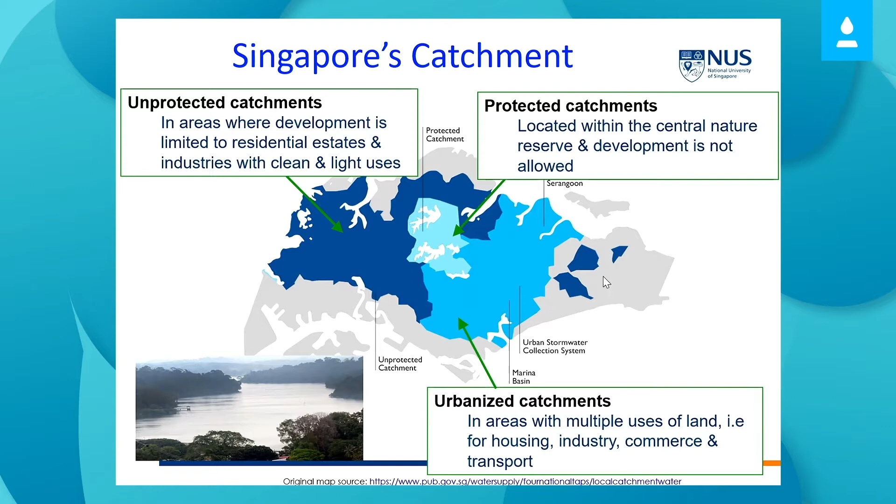In terms of Singapore's catchment for water, we are actually trying to expand along the years, making use of technologies that help us to do so. For example, Marina Reservoir is a relatively new reservoir - the first reservoir in the city center, which collects rainwater from the highly urbanized catchment. This was built in 2010.

One year later, we built two smaller reservoirs - Punggol Reservoir and Serangoon Reservoir. Together with Marina Reservoir, they increased Singapore's catchment area from previously only about half of the land area to now two-thirds of the land area. So this is something we have done through infrastructure building to expand the catchment.

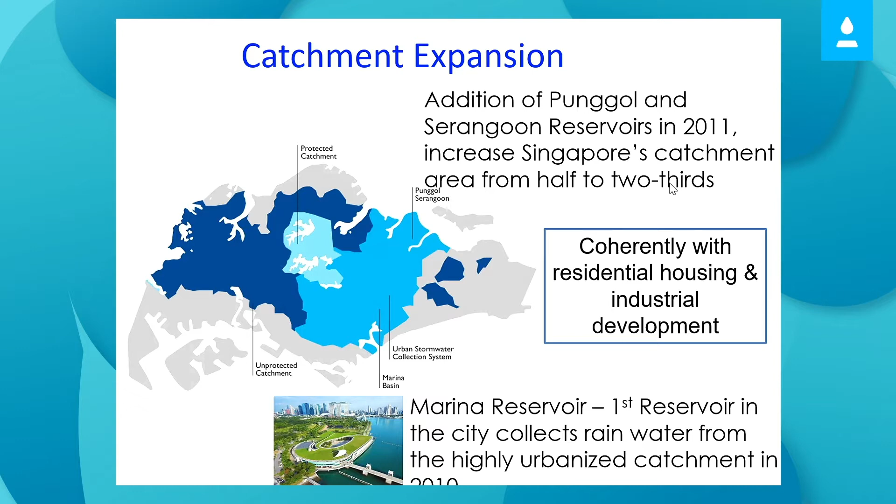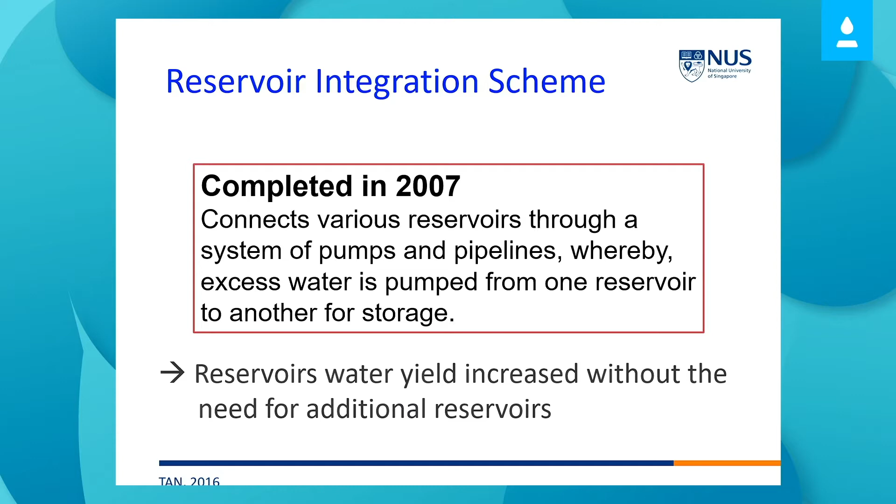On top of that, there's also a reservoir integration scheme, completed in 2007. Under this scheme, we connect various reservoirs through a system of pumps and pipelines, so excess water from one reservoir can be pumped to another for storage. This way, we are able to manage the quantity and quality of water and optimize the performance of the reservoirs. Through this integration scheme, reservoir water yield can be increased without building additional reservoirs. This is something we have done nicely, on top of building those novel reservoirs located in the city center.

Another strategy we have is the so-called harvesting of unconventional water resources.

Singapore came up with an integrated water management system. Underneath this system, we have 4 national taps. Singapore developed these 4 national taps to ensure a stable and sustainable supply of water. The first is water from our local catchment, basically water we obtain from our reservoirs.

Number 2 is imported water from the neighboring country. Number 3 and number 4 are the 2 national taps we recently developed, and that's why I'd like to highlight them more. Number 3 is called NEWater, a highly purified reclaimed water. Number 4 is desalinated water.

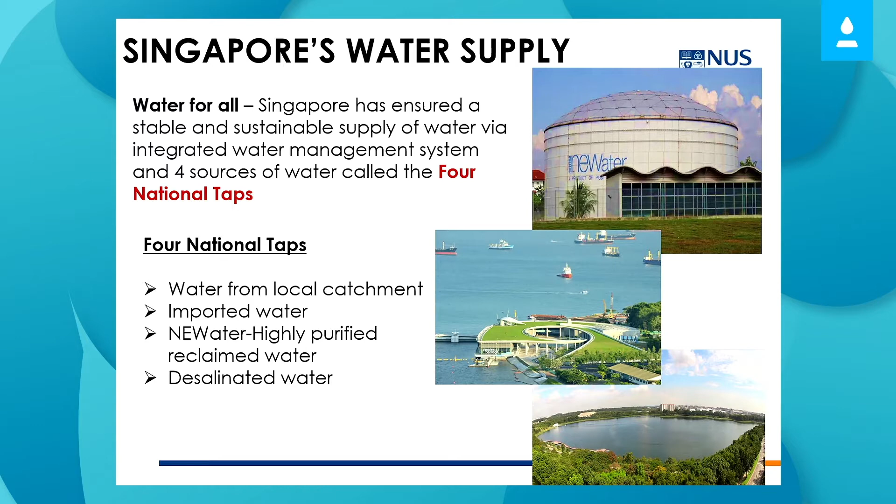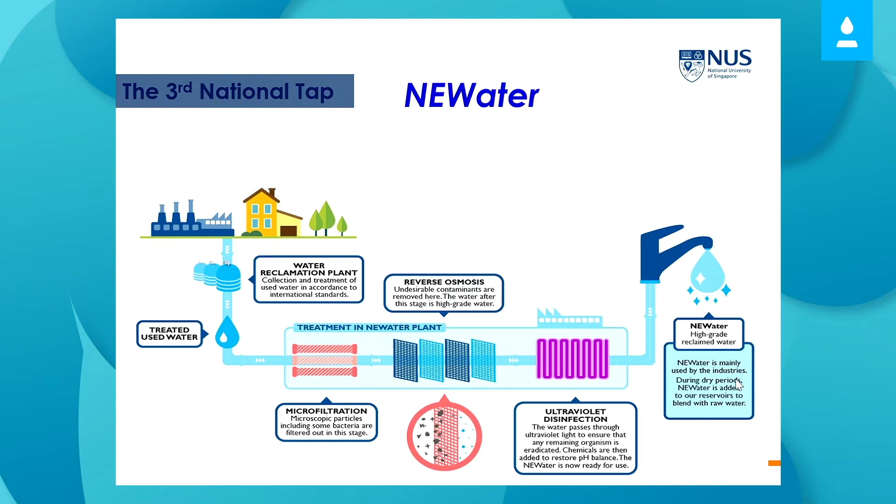In the past 2 decades, Singapore put in a lot of effort to develop national taps number 3 and number 4. For NEWater, our third national tap, it is basically treated effluent from what we call a water reclamation plant. It goes through processes like microfiltration, reverse osmosis, and ultraviolet disinfection. Eventually we generate very high quality reclaimed water, which we name NEWater.

In terms of current status, NEWater is able to meet up to 40% of the nation's current water need. Almost 40 years later, we expect NEWater to be able to provide 55% of Singapore's future water demand. This is one of the NEWater factories at the east part of Singapore, very close to our airport, using reverse osmosis technology, the core technology that helped make NEWater a reality.

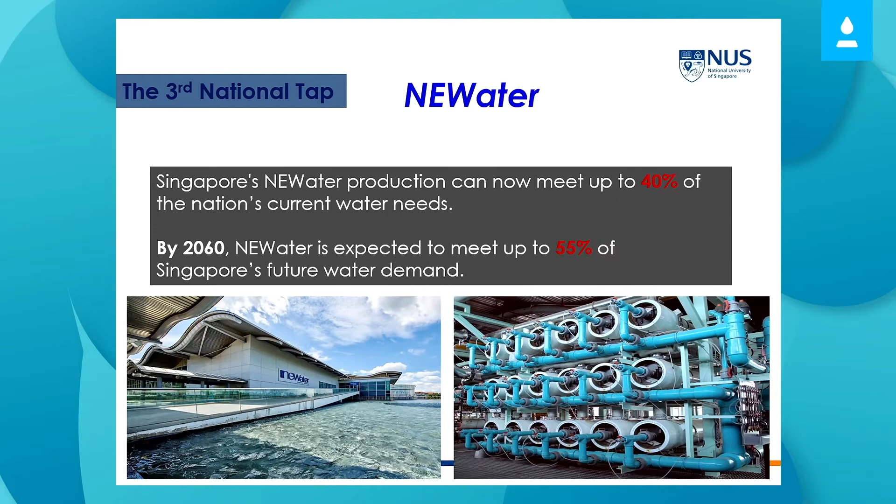Before we launched the NEWater project, we studied the NEWater quality very intensively. We looked into a number of water quality parameters, including physical, chemical, and microbiological parameters. Eventually we concluded that NEWater is able to even surpass the existing quality of the potable water we have.

Another thing we did was adopt animal studies to examine the potential health effects. We concluded that NEWater doesn't show any negative health impact on the animal models we chose. These 2 very important R&D research projects were conducted by a group of researchers at the National University of Singapore before we made NEWater a reality for society.

For this toxicity and carcinogenicity assessment, we made use of mice as our model. This is our animal model. We fed them the concentrate obtained from our NEWater and observed any potential toxicity and carcinogenicity over the lifespan of the mice. Our conclusion: no negative health impact observed.

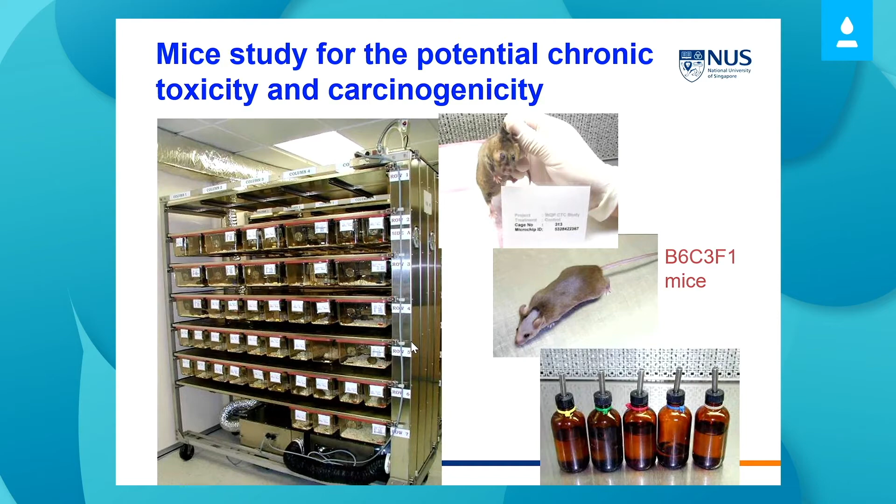On top of that, we also studied estrogenicity, making use of the transgenic fish, which is also a very nice model. In fact, NUS was the one that developed the protocol for the reclaimed water fish study. We were the first in the whole world to develop such a protocol, during the period when we were studying the potential health impact of new water.

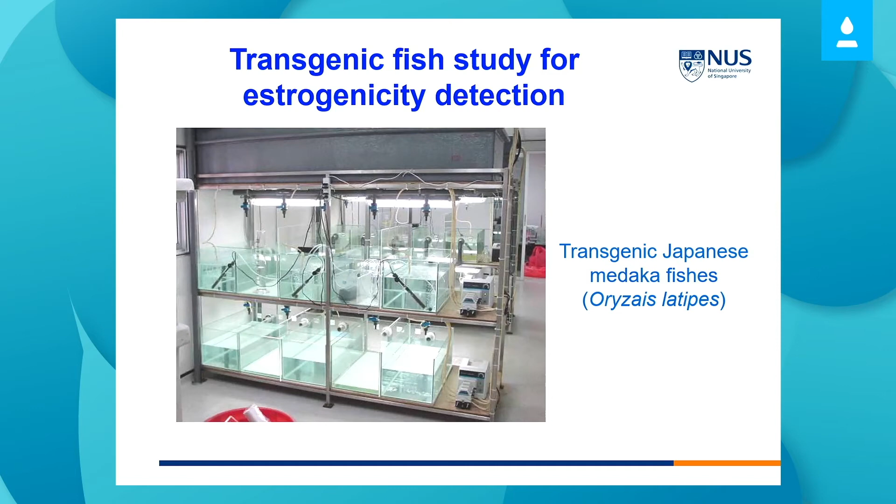We made use of the Japanese Medaka fish and observed 2 generations of the fish. The conclusion is that we couldn't observe any estrogenicity, which means we didn't see any negative health impact from this new water. All right, so that's our third national tap.

The fourth national tap comes from desalination. Basically, the seawater goes through reverse osmosis technology, and you generate drinking water, which then goes into our drinking water distribution network and blends with our current drinking water.

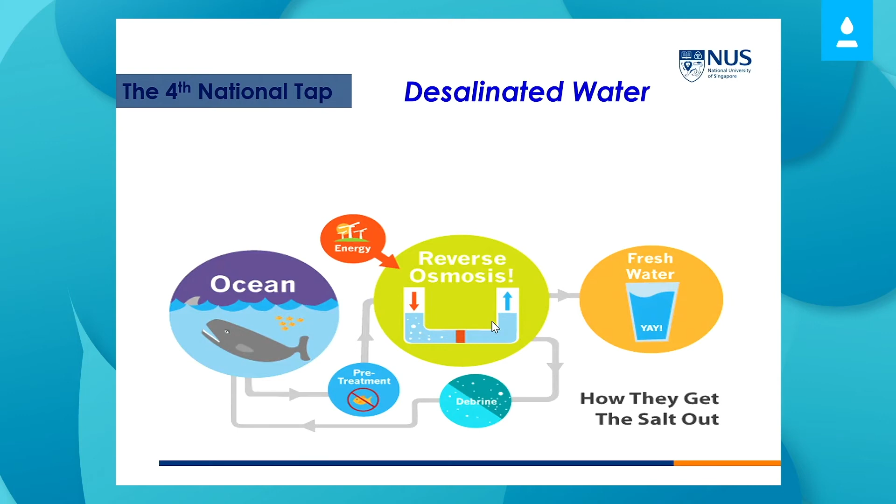So what is the status of our desalination in terms of providing water supply to Singapore? In 2005, we developed the first desalination plant in Singapore, one of the largest seawater desalination plants in the region. Subsequently we built an even larger desalination plant, then in 2017 we got a third desalination plant, and in 2020 a fourth desalination plant.

The aim is that by 2060, we hope desalinated water will be able to provide 30% of Singapore's future water demand.

After we developed such an integrated water management system, we are able to put the water in a closed loop. You can see the water come from the sky, it precipitates to the ground, it will be captured by our reservoir, treated for domestic and industry use, and the used water will be treated by the wastewater treatment plant. Some of it will go to our NEWater factory and come back to serve our industry, and a small portion will go into our reservoir to recharge it.

Seawater will be desalinated and will provide drinking water, going directly into our domestic use as well as industry use. So from here you have a very clear idea what I mean by the integrated water system in Singapore, which consists of four national taps. This makes our water supply sustainable and sufficient, allowing us to overcome the challenges we originally faced.

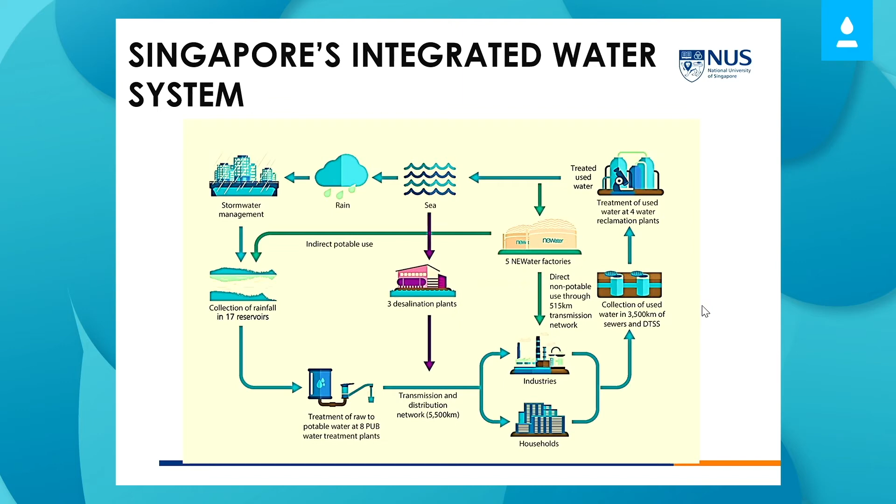Now I'd like to add a bit more on top of just those two strategies, because the challenges we face also give us opportunity, especially the opportunity to develop industry, the water industry. The water industry very much likes to promote innovation in terms of technology and commercialization of novel technologies. Singapore also wants to develop industry in that direction, and through developing our industry, we are able to make Singapore's water management even more sustainable. So R&D, technology transfer, and commercialization are very important aspects.

I'd like to highlight that since I am heading this Center for Water Research as director, the Center for Water Research was developed to closely collaborate with industry to provide R&D capabilities and water solutions to the industry. At the same time, we also generate a lot of capable manpower to support the water industry.

The Center for Water Research works on four aspects of the research and development domain. One is used water treatment and reuse. Another is advanced membrane process. The third is water treatment and water quality assessment. And the last one is about renewable energy.

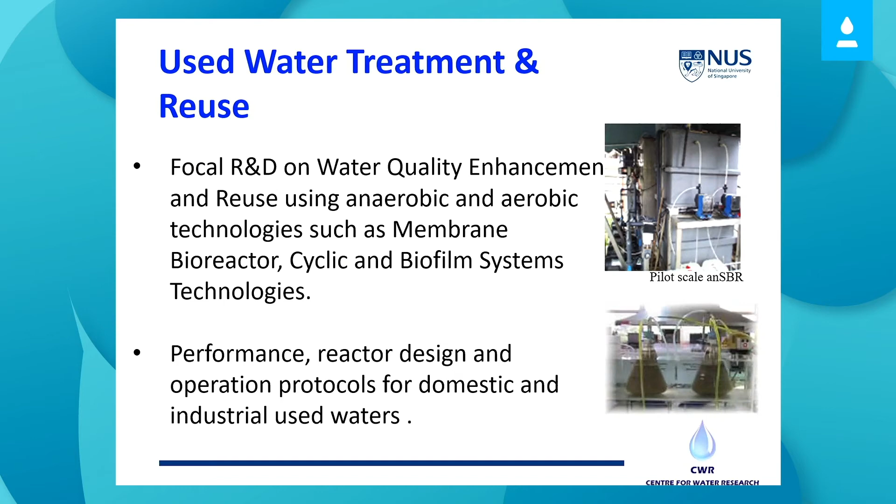Let me give you one example of what we recently did. We have a technology which couples advanced oxidation process together with biological process to treat industrial wastewater, trying to achieve low COD concentration in the treated effluent for two purposes: one is to meet the discharge standard, or if the quality is acceptable, the plant can also recycle this water for their own reuse purposes.

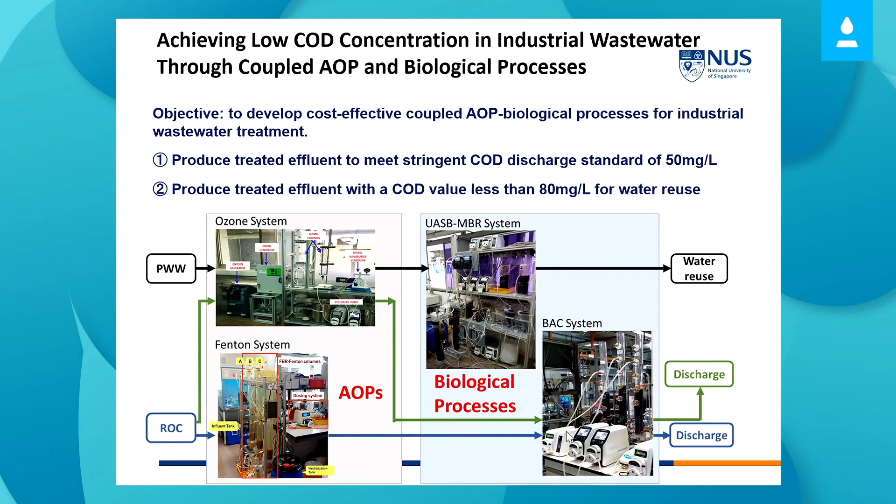So in the Center for Water Research we developed advanced oxidation processes like an ozonation system and a Fenton system, coupled with downstream biological processes. It can be UASB followed by MBR, or simply followed by a BAC system, which is biologically active carbon. This way we can make the water reusable, or make it meet discharge standards, even very stringent ones. This kind of combination is capable of doing that.

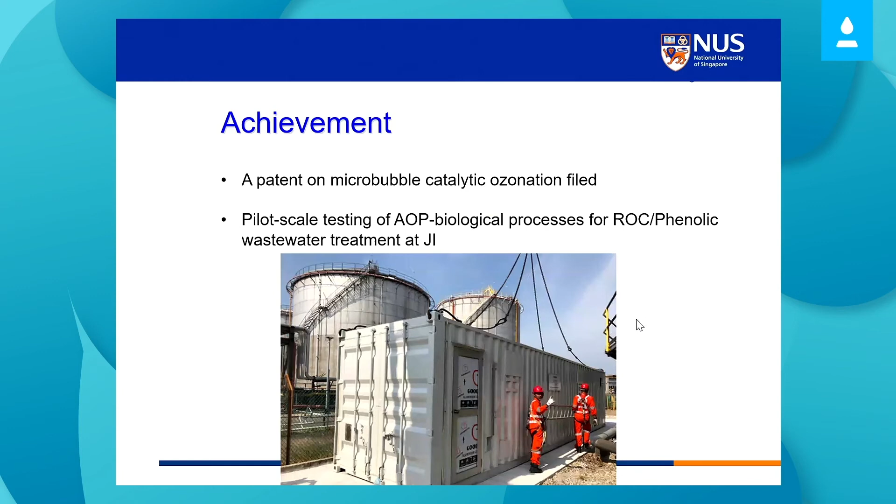So we have filed a patent, mainly focusing on the catalytic ozonation process. We also built a pilot scale system hosted in a container, and moved this pilot scale system to one of our industrial islands to prove this technology works in real situations for two types of industrial wastewater: one is reverse osmosis concentrate, another is phenolic wastewater. After finishing this round of pilot testing, this technology is ready for commercialization. That's one example I'd like to highlight under used water treatment and reuse.

The second domain we work on is advanced membrane process. We cover different types of membrane processes: MF, UF, RO, forward osmosis. We work on understanding fundamental mechanisms and pollutant transport, process optimization, as well as innovative membrane system development.

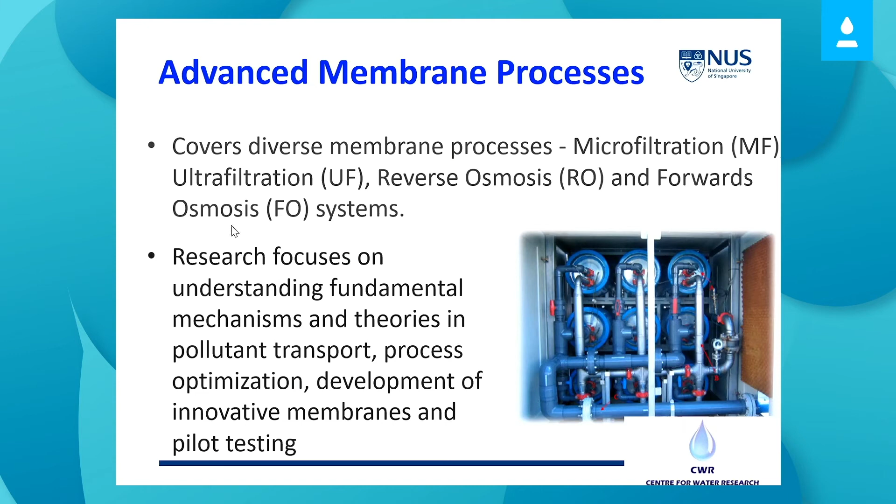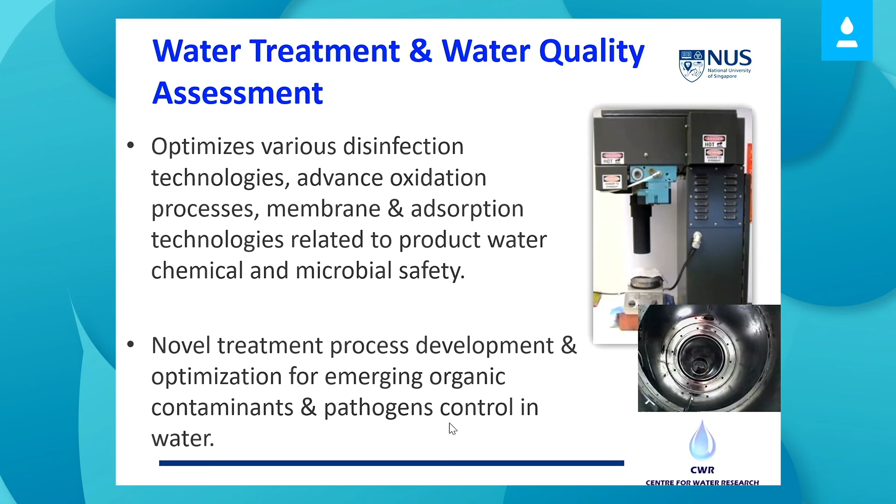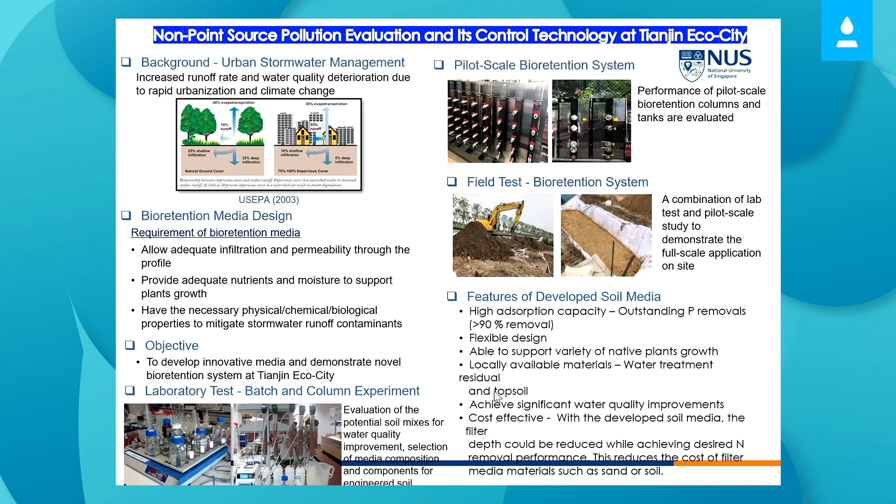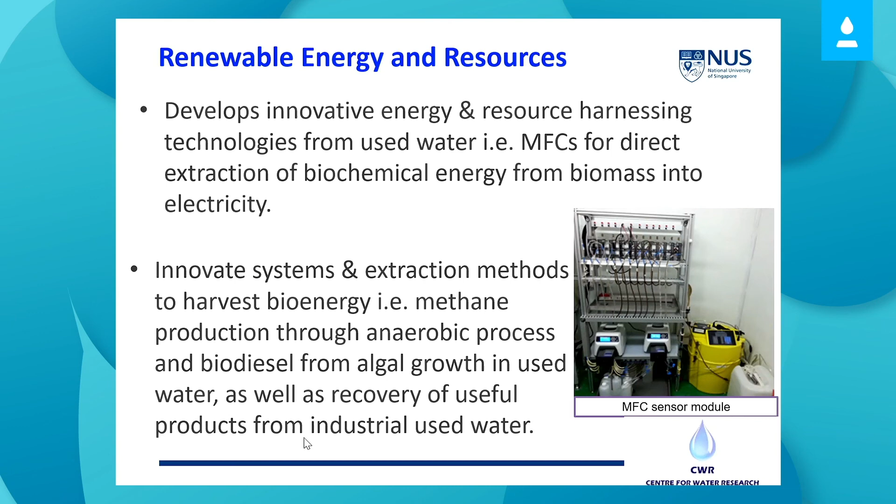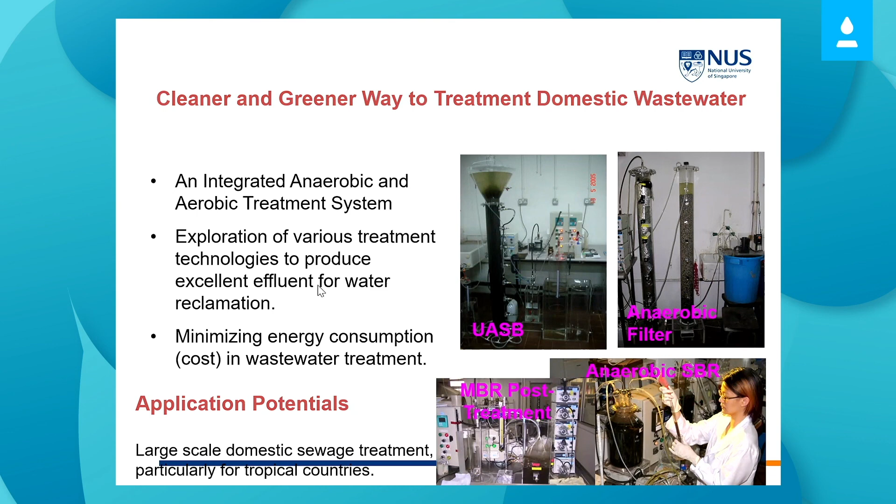Toward the end, I would like to highlight that the Center for Water Research emphasizes a lot on the partnership between industry, R&D institutions, as well as education units. We work hand in hand to provide manpower, know-how, and innovative technologies to the water industry, so that it also serves its purpose to contribute to Singapore's sustainable water management as a whole.